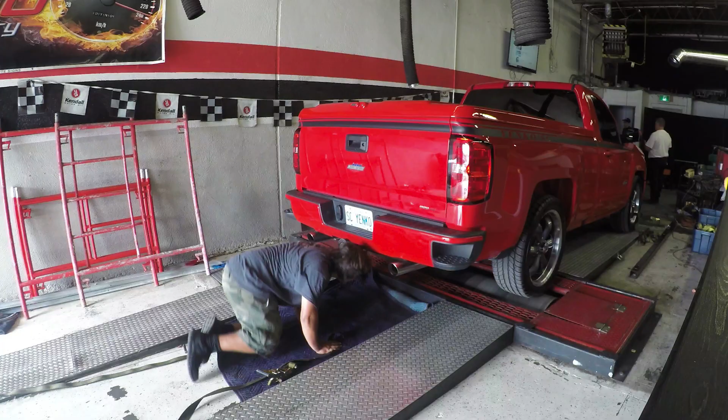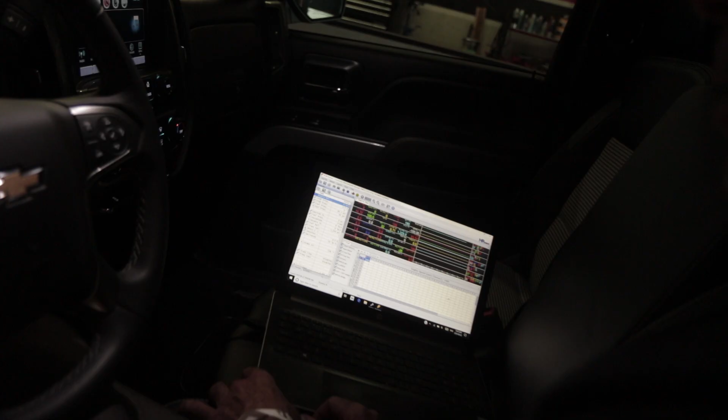We have a special vehicle that's in here this morning. It's a special version of a General Motors truck. It's a 6.8 liter supercharged, short box, two-wheel drive, Yenko General Motors pickup truck. It's supposed to make 800 horsepower at the crank and 750 foot-pounds of torque. We're going to test that. We're also going to do tuning. That's what we do here at International Dyno, is tuning.

Randy Speaker owns this truck. He has quite a large collection, quite a successful collection of all different types of vehicles. But this morning, we're going to work on this one. So this is going to be starting from baseline, working our way through the tune, and checking to see how much power it has. And then we're going to bring in our tuner, Wally. And Wally's going to work on making the truck drivable, making sure that the air-fuel ratio is correct, and we'll get a final result when we're done as to how much torque and horsepower we can add to the advertised amount.

Every vehicle that we do, we follow the exact same procedure. So the first thing we do is sync the gearing to make sure that the tachometer and the computer are reading the same thing as our dyno is reading for RPM. We usually sync them at 2000 RPM. Then we do a baseline run because we need to know how much power and where the performance is before we start tuning. So when you came in, your vehicle made X amount, and then we start tuning. We'll show step by step how much more power it makes as we go through the tuning process.

So the first one we did today, we end up with 589 foot-pounds of torque to the wheels, which is slightly over advertised torque, but it's really, really close to what they're supposed to make. 750 at the crank, 800 horsepower. So the horsepower is down a little bit. Until the tires warm up a little bit, we have to take it a little bit easy on the throttle. And as we warm the tires up, we'll be able to be more aggressive on the throttle. We're going to do 2 or 3 more baselines, then we're set with our baseline runs. We'll have good consistent numbers here. Then we'll start with the tuning process.

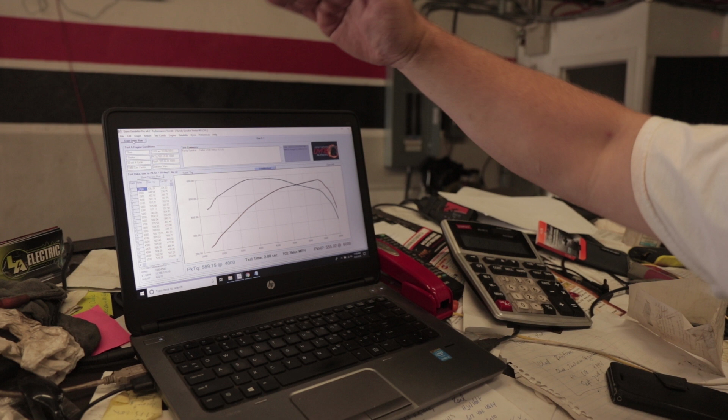Now, the tuning process, what we're attempting to do here is take this tail that's down here, bring the tail up and then bring the entire amount up above the next line. So we'd like to be somewhere between 600 and 650 torque to the wheels and not have this delay over here where you step on it and it's inefficient and it doesn't go. So that's the next step, is to run some more baselines and then begin tuning.

We've finished the baseline runs, and at this point, what we're doing is analyzing the data. We are right at the advertised torque, and we're a little bit below the advertised horsepower to the crank. Anytime you see numbers on a vehicle, or on the website, or online, it's going to be what the engine makes at the crank. We do horsepower at the wheels here. The accepted number for most vehicles is 15%. Older vehicles, obviously things are going to wear out. They're going to make a little bit less at the wheels than when they were advertised from the factory. Most of them are pretty close, so at 15%-ish.

So right now we're just like 3 foot-pounds below the 750 that was advertised, and we're just a few horsepower below the 800 that was advertised from Yenko. Nothing to do with Yenko. Here's the reason why today. Weather affects everything. There are a few things that come into play. You have elevation that is part of correction factor, humidity and temperature.

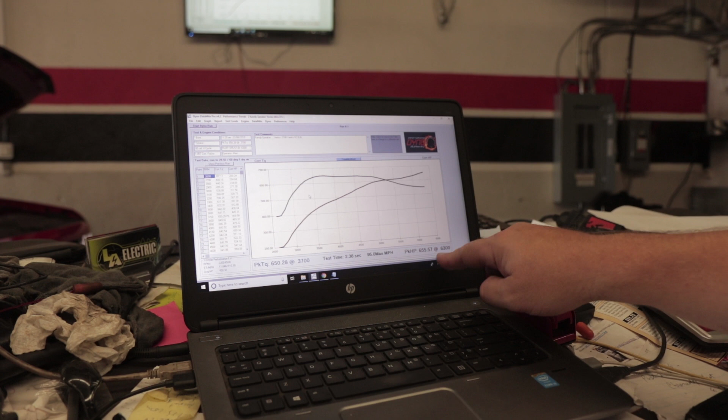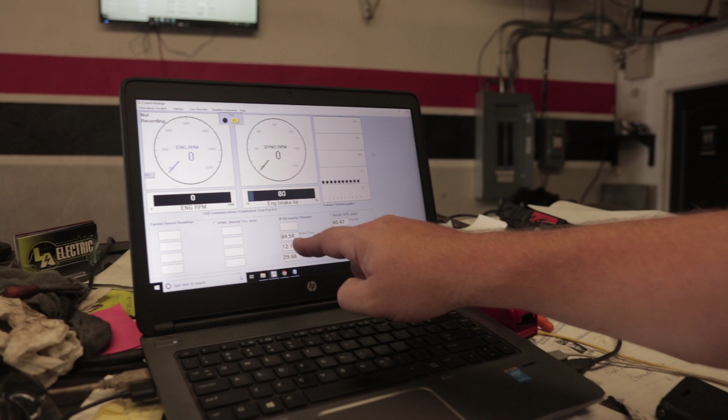If we look today, 650 foot-pounds to the wheels, 655 horsepower to the wheels on this truck right now. But we are fighting some weather here today. It's warm, it's 85 degrees, it's 43% humidity. So the barometric pressure is just a little bit low. All of those things add into what we have here for correction factors.

So right now we're correcting about 6% to get the number to where it should be. And that's a number and a formula that is used by the Society of Automotive Engineers worldwide. Whether you're in Colorado, Australia, Michigan, Detroit, which is where the numbers come from, or right here in Ottawa, Ontario, Canada, the numbers come from there.

So this is where we are right now, and we have a live weather station that's going to keep us up to date. We're going to start with the tuning now and bring this machine back up and try and get it well above the advertised numbers. And this is what we do here at International Dyno, is make things run correctly.

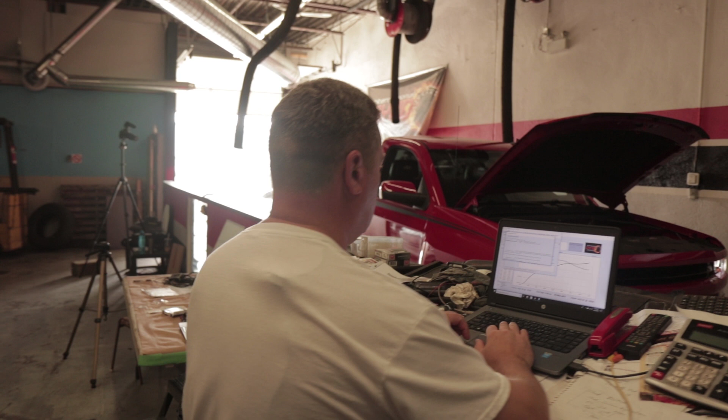Okay, just wrapping up our Yenko day here at International Dyno Authority. We did what we expected to do. On many vehicles we see a very large difference and a very large increase in horsepower and torque. We pretty much expected this vehicle. It came with a tune. It's a very special truck. It's in the range of $110,000 to $120,000. You buy the regular truck, they put a Yenko package on top of that. It actually goes off to Yenko and has this done.

When it came in, it was making its advertised horsepower and its advertised torque within a tiny, tiny bit. It's running extremely well. It was in kind of race mode all the time, so the owner had some drivability things that he wanted fixed up. There was really nothing wrong except for it was kind of aggressive all the time. So we took a little bit of the aggression on the street out of it, gave it a little bit better street manners. And as we're about to show you, we gave you a lot more.

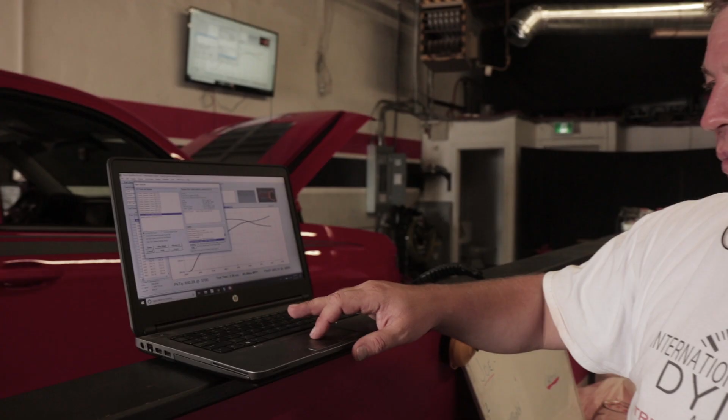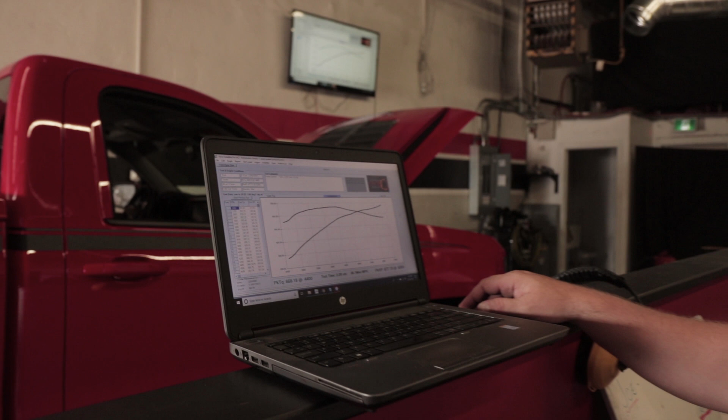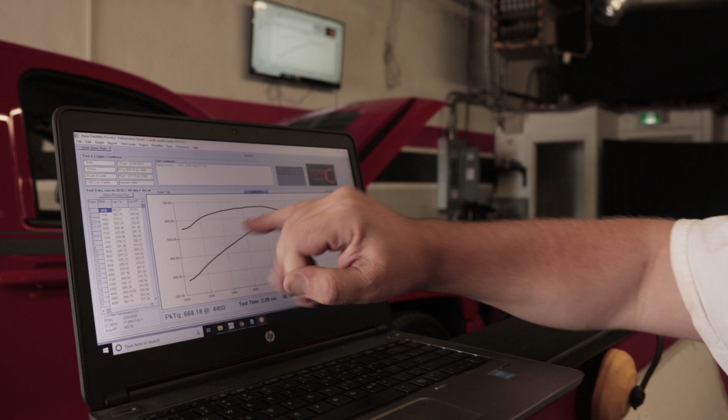Hey Randy, we gave you a lot more horsepower and way more oomph off the bottom. We ended up 668 foot-pounds of torque and 677 horsepower. Doesn't seem like a great big gain till you start looking at the amount and where it was gained. You're always trying to add horsepower what's called under the curve, which means under here, in this area where it doesn't make its great big huge number up here. You're trying to make more power here.

We successfully did that, and I want to show you just how much more torque or turning force or takeoff you get from this vehicle. When we come to the torque difference now from where it was to where it is on the street, you're going to feel this. We made 155 more foot-pounds of torque at 2600, and yes, it changes as it goes through.

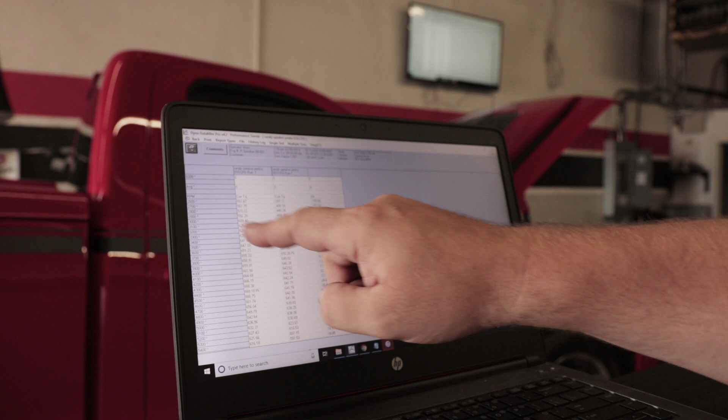We weren't able to carry that all the way through because the engine's already good, the tune was already pretty good. Matter of fact, Wally said the fueling wasn't that far off. The fueling was pretty decent. He fixed the fueling, he made some changes to it, and now we are maintaining what was peak torque before from 3600 to 4800, and we're way above that. We're up at 668 foot-pounds of torque now. This is going to be a lot of fun to drive.

It's going to be more pleasurable to drive than it was before, and frankly, that's what we do here at International Dyno Authority. Even though you don't care about it, you're going to get better fuel mileage, and we've made a huge increase in the way this machine runs all the way through. This is the big deal though. Look at here, the difference between these two, 155 foot-pounds of torque right off the get-go. If we look at this, and then we come back here and look at this, when you step on the gas, you've got instant torque now.

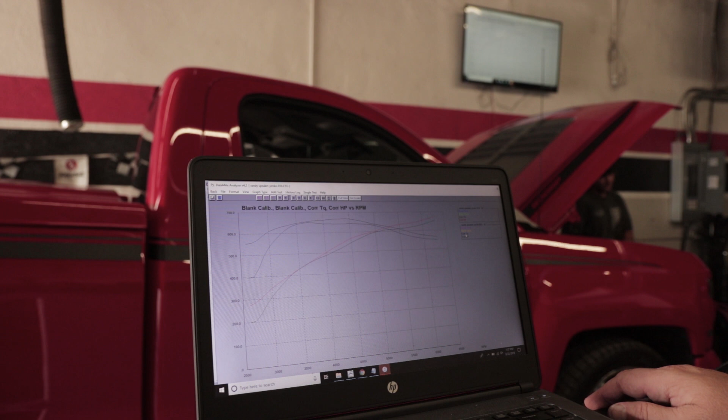So happy to have this truck in, happy to do it for Randy from Randy's Toy Box. It's a Yenko supercharged truck that runs well and looks awesome.